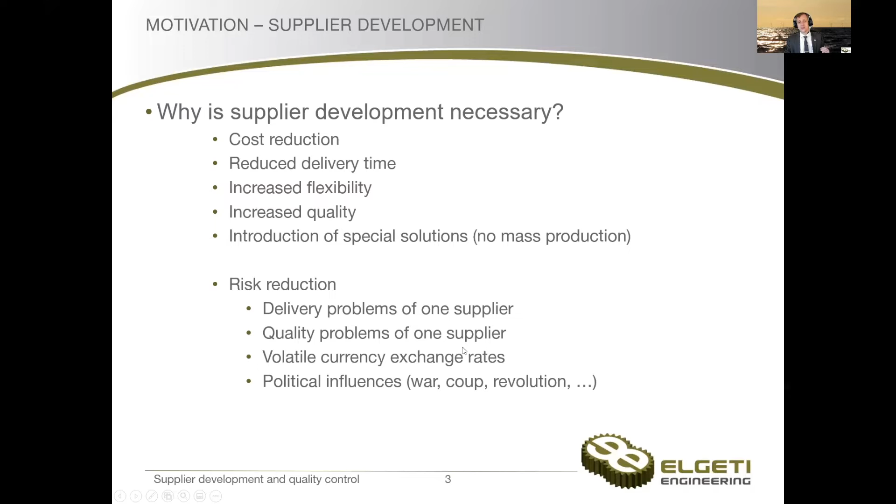Therefore, for all these reasons, we need to have a very flexible supplier base. If we would have only one supplier, or all our suppliers from the same country or region in the world, then we would be directly exposed to all these risks. That's why we need to address these risks and find alternative options.

So next, why shall purchasing be involved in quality assurance? Let me briefly summarize this. I think the first line here is most important: we all have to be aware that each supplier approval is a general quality risk.

No matter how many audits we do, no matter how much bearing testing we do, we can never bring all our risks down to zero. There will always be a remaining risk, and that's something we have to take into consideration.

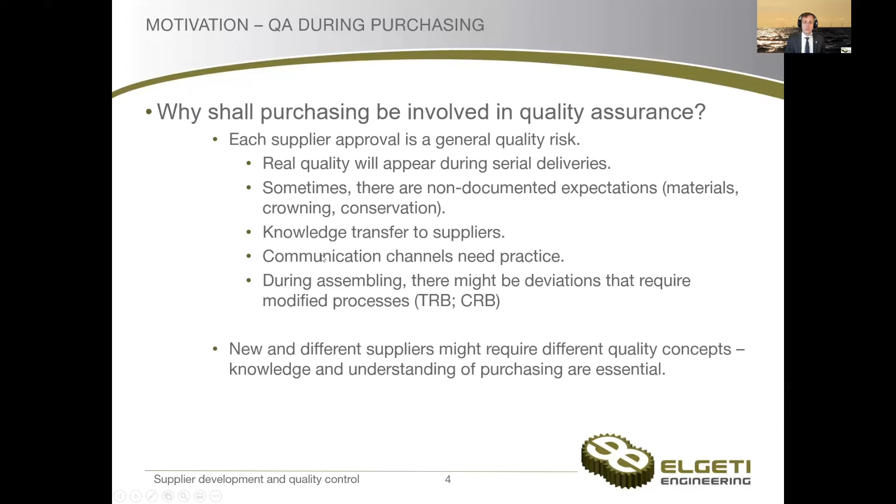So just quickly summarize, the real quality will appear during serial deliveries. The truth is on the playground, as they say in football. And sometimes there are non-documented expectations on the materials, etc., which suddenly turn out to be important. In the past, we might have transferred some knowledge to our suppliers, new communication channels need practice, etc.

A lot of details in the collaboration can become critical whenever approving a new supplier. These are things that purchasing certainly needs to be aware of. It's not only the price, it's not only the lead time. These details need to be taken into consideration.

Now, some further pictures on what can be important. So if we don't do this supplier approval properly, for example, if this would lead to a change of cage geometry, as was the case in a railway application, then we might end up in serious trouble.

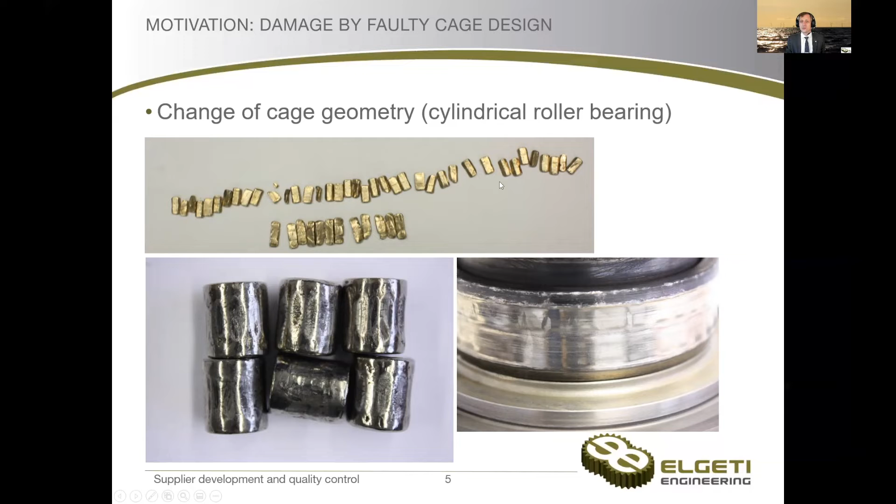This used to be a brass cage of a cylindrical roller bearing, and I think the further pictures on this slide demonstrate why it is important to take particular care for such details.

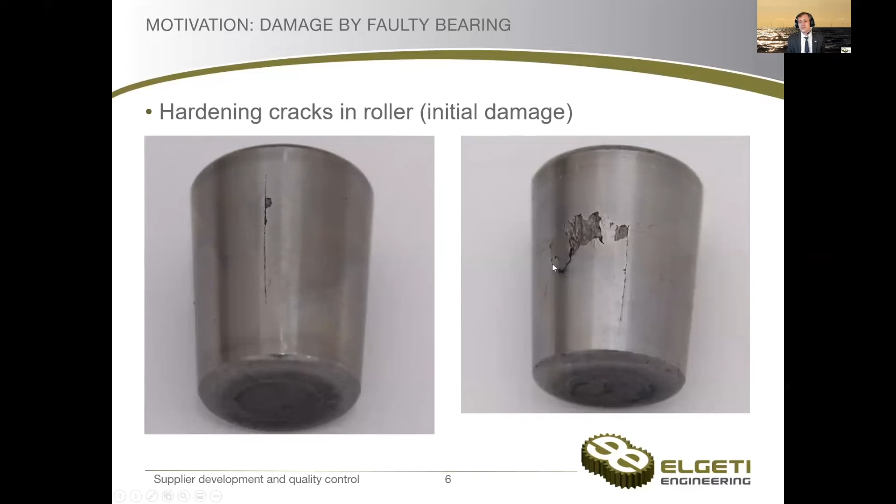If we would approve a supplier that doesn't fulfill our requirements, we might end up with hardening cracks in rollers, for example. These are topics that need to be addressed. These would lead to immediate failure. Shoulder fracture due to improper undercuts of roller bearings can be an issue.

These are examples of cases where supplier development has not been done correctly, and our customers ended up in serious trouble.

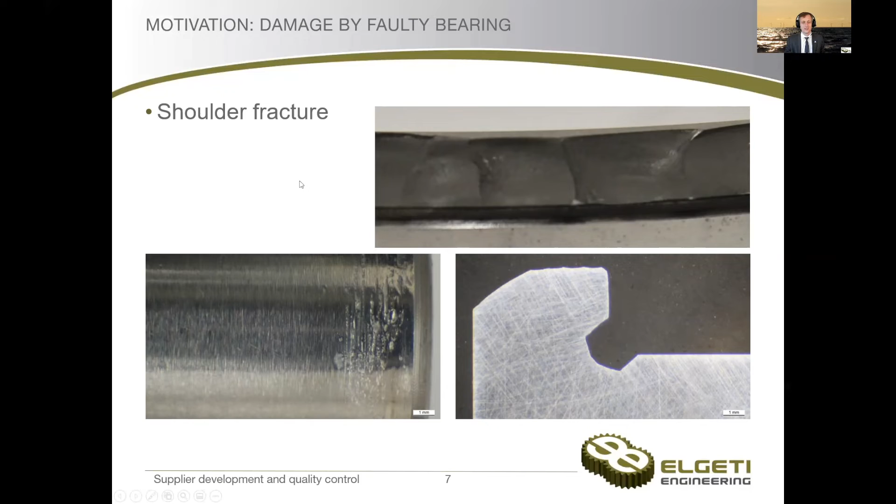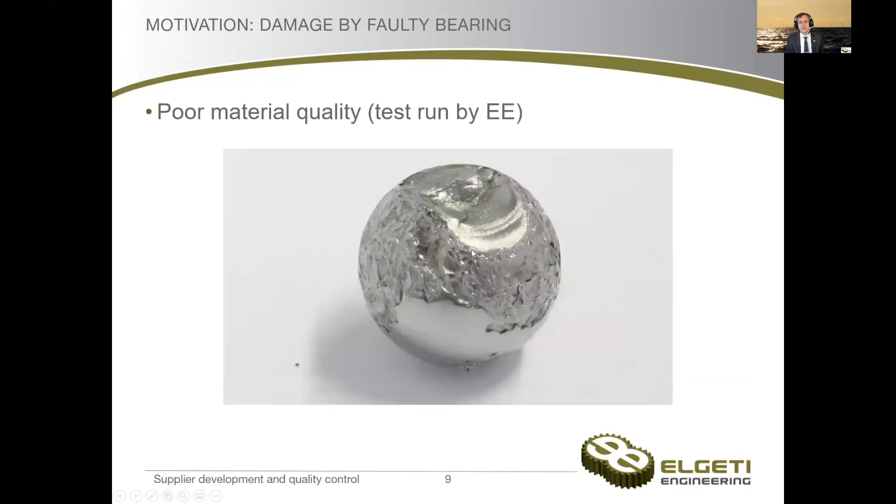So it is important. We have lots of reasons to approve new suppliers, and the recent pictures just emphasized how important it is to do all these things properly, to take the time before you have pressure, to be sure that you can always rely on your suppliers fulfilling your requirements.

This brings us directly to the next chapter, the definition of quality levels. Especially in the bearing trading business, it is quite common that people offer their products in various quality classes, with particular fancy brand names behind this. Sometimes this makes sense, sometimes I think it's questionable.

While questionable does not mean necessarily that it's wrong, it just means it's worth asking a question.

On the other hand, we all know that requirements can be very different. We do not always need the best of the finest or the finest of the best. It's not always necessary, and knowing your requirements very well can help save plenty of money.

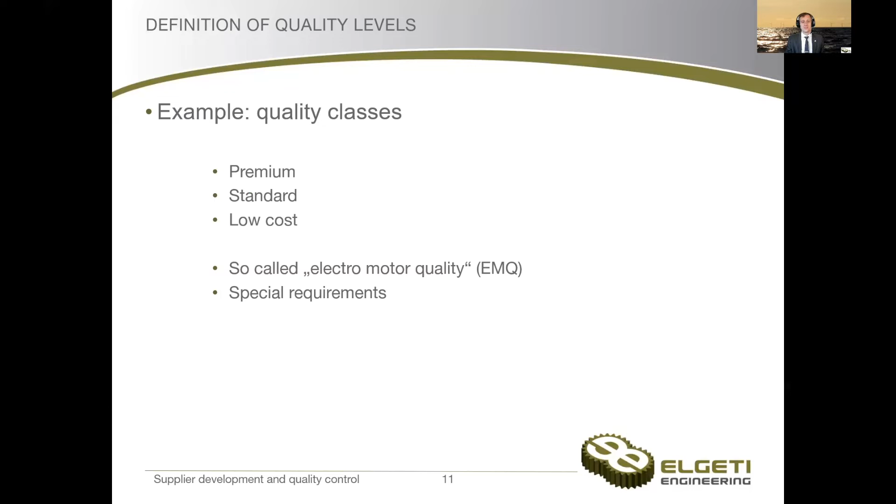So what does actually standard quality mean? To me, this is nothing that comes from literature. This is my personal proposal, and my definition of standard quality is very simple. It means that we can calculate the load rating of the bearings just based on the geometry and following the formulas and equations given in ISO 76 and ISO 281.

ISO 76 is for the static load rating and ISO 281 for the dynamic load rating. If we do this, and if we then do our dimensioning and lifetime prediction according to these standards, then our resulting expectation on the performance of the bearing must be fulfilled by the real product. This is basically what standard quality means.

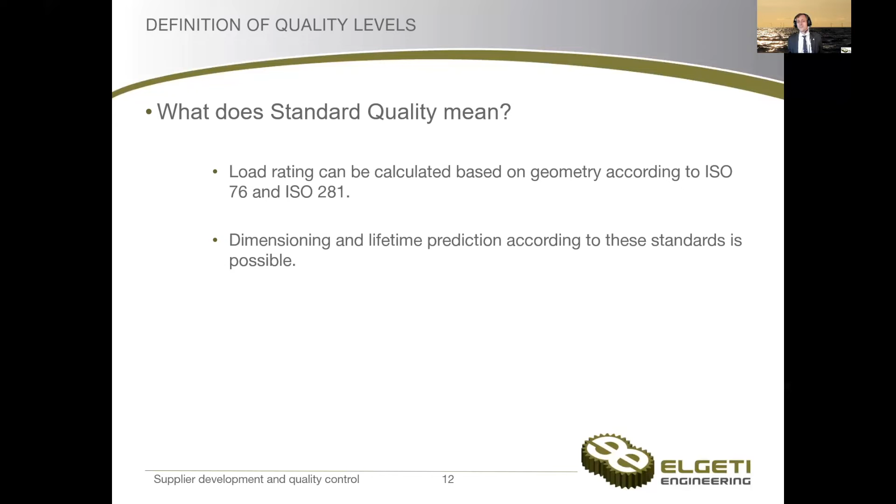So we take a bearing, we look at the geometry, we calculate the load rating. With the given loads, we can calculate lifetime, and the bearing needs to reach this life. That's basically what standard quality is about. Nothing more, nothing less. And what does this mean in technical terms?

Well, some assumptions that are behind these two standards, not explicitly written for each of them, are firstly that we have a hardness of 58 Rockwell C, material cleanliness according to ISO 683 part 17, fine grinding of raceways instead of super finishing—this is highly important—and production methods according to the state of the art from approximately 1990.

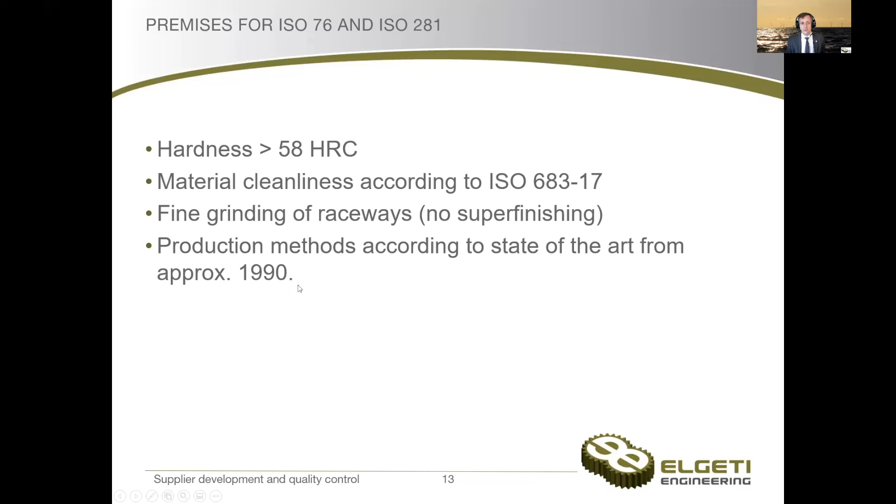And this already shows us why we can distinguish premium quality. What is the difference? There's no difference considering the static load rating, because in both cases we assume 58 Rockwell C, but the real endurance exceeds theoretic life by far, especially in mixed friction. That's most important. Where does this come from?

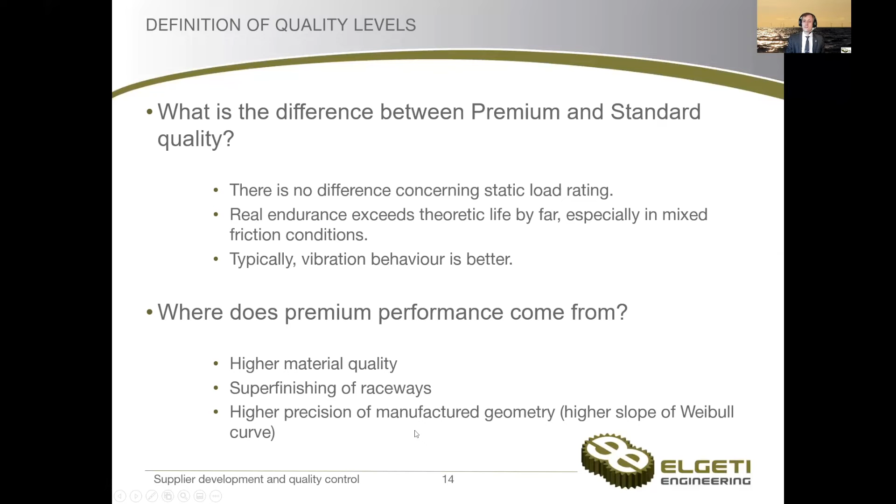Well, firstly from higher material quality, and then from super finishing of raceways. So remember, the standard requires fine grinding, but nowadays super finishing is common practice, especially for small size bearings. That means in theoretically mixed friction conditions, we basically have full fluid lubrication conditions, and therefore our bearings perform significantly better. The higher precision of manufactured geometry leads to a higher slope of the Weibull curve.

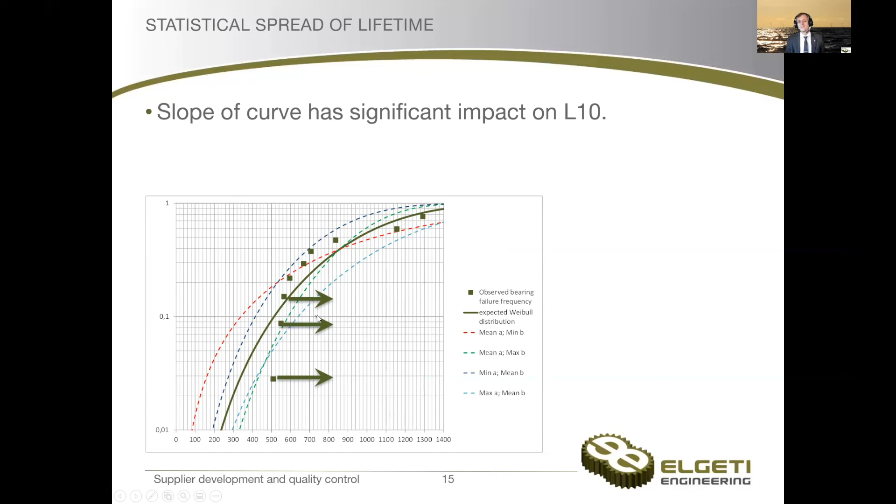That would change dramatically actually. Low cost quality, again, we would have the same static load rating, but we typically do not really achieve the theoretical life, which means low cost quality can be totally fine, for example, for the wheels of a shopping cart, etc. Nobody cares for the life calculation. Just the static load rating shall be given, so that it will not break away or something.

So now let's talk quickly about the factory visits and audits.

Factory visits and audits are important for understanding how bearings are actually produced, how manufacturers control their quality, what corporate culture they have, and whether they are reliable.

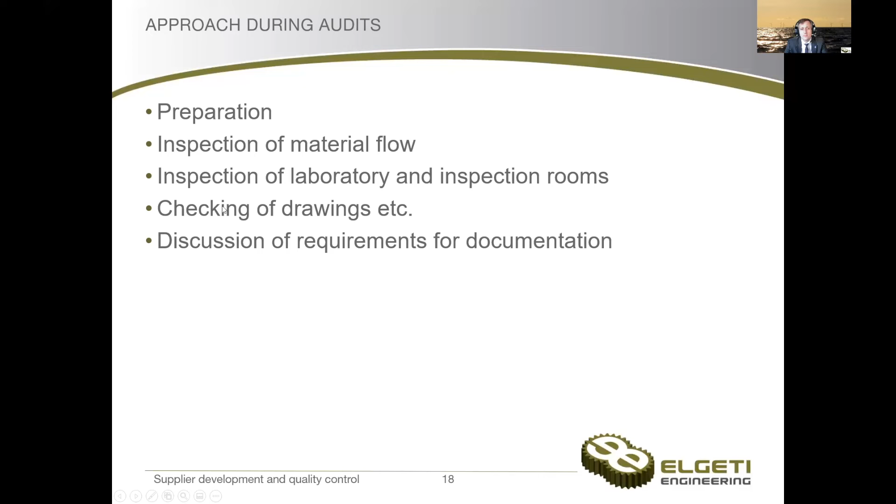So what shall we do? Firstly, we have to prepare ourselves. Then comes inspection of the material flow, inspection of the laboratory and inspection rooms, checking of drawings, and finally discussion of requirements for documentation.

So preparation of the audit is most important. If we are not well prepared, we can always be happy with each supplier, or we can be unhappy with each supplier, because there's always something we can find that could be better. Our evaluation would not be correct or appropriate if we weren't well prepared and didn't reflect on our actual requirements.

For example, it's very important to simply ask the question: do we really need premium quality, or could we possibly be fine with standard quality, or maybe even low cost quality is enough? No matter how low the requirements are, they still need to be safely fulfilled.

So which types are most important to me? Is there something we can address directly? Which quantity do I need? Did I have problems in the past? If so, what kind of problems? This would also help us directly address these matters.

Whom do I talk to, and in which language? Language barriers can actually lead to underestimation of the supplier, because simply, the people will not give the proper answers. And if we don't get the proper answers, we have to consider: either they don't know, or they are not really competent, or they just don't feel safe or secure with their limited language skills, or they didn't understand the question.

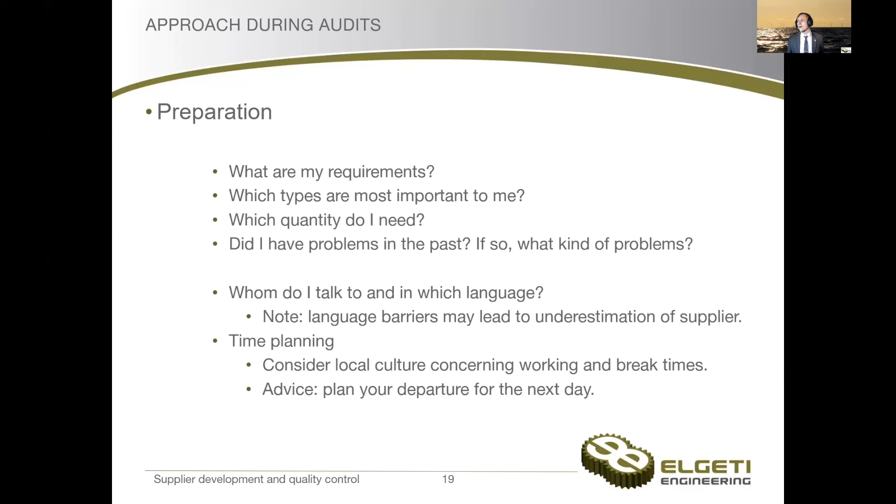Time planning is important, so always consider local culture concerning working and break times. Sometimes it can help to plan your departure for the next day, just to work around situations where people would waste time by intention just to avoid showing their details to you.

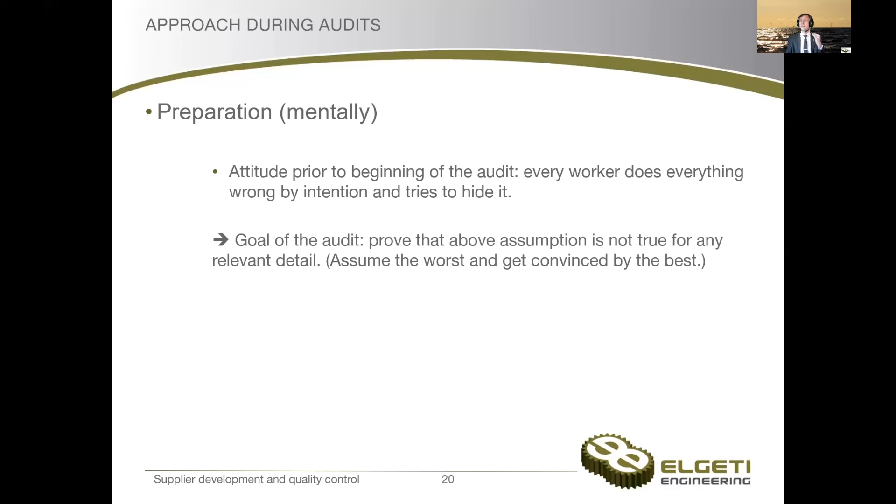Then mental preparation is highly important. The attitude is: before we begin, assume every worker does everything wrong by intention and tries to hide it. The goal is to prove that this assumption is not true for any relevant detail. So basically we shall assume the worst in the beginning and get convinced of the best. This is nothing personal - this is just the role of the quality audit.

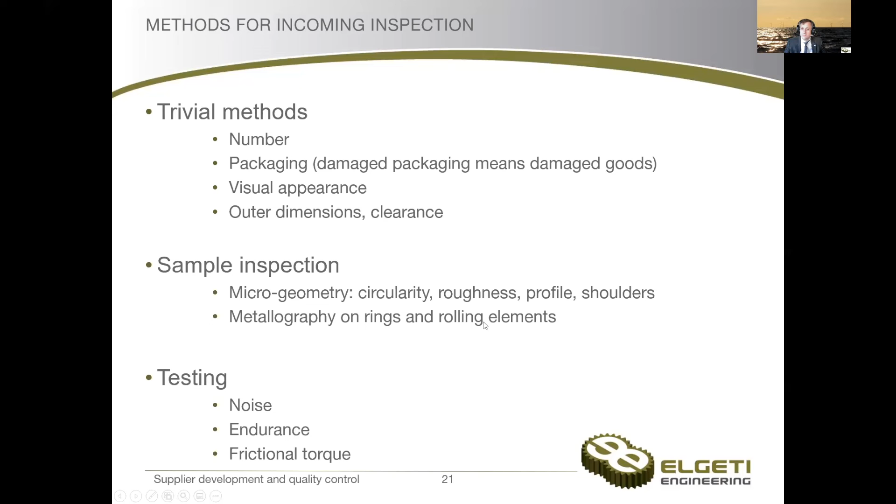So then let's talk about the inspection methods. Which methods do we have? The trivial methods for incoming inspection: counting the packages, looking at the packaging, visual appearance, outer dimensions, clearance, etc. Then we can measure the microgeometry, check the material, and apart from that, we have several testing options. Oh, this slide is a little bit mispositioned.

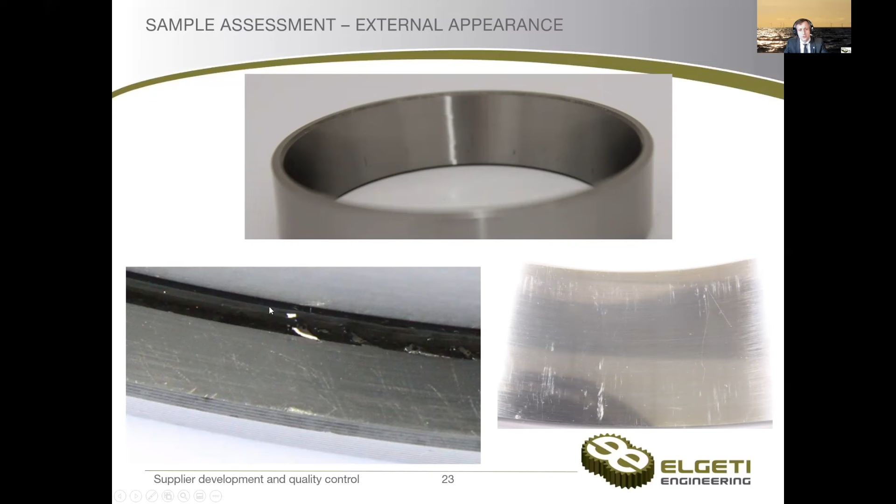Just quickly, if we do the visual inspection, what we don't want to see, for example, is transportation damages. We don't want to see chips and burrs here in the undercut of a tapered roller bearing.

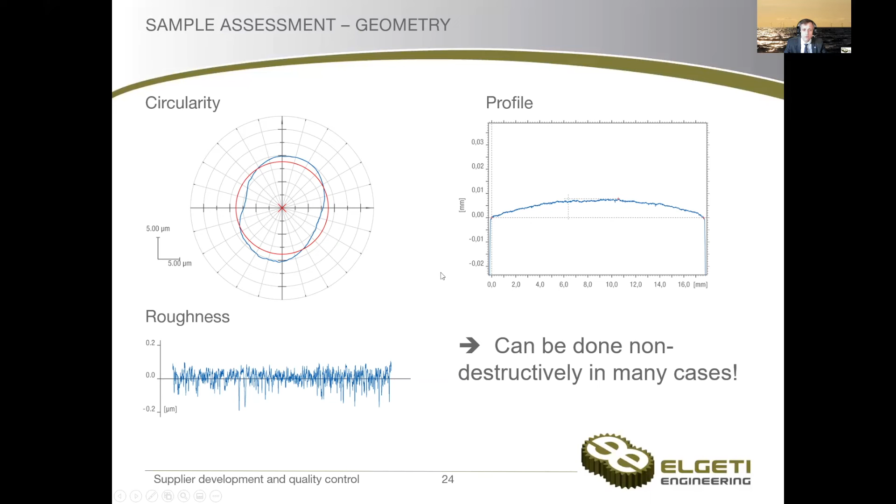We can, and this really makes sense, check every now and then the geometry of our samples - for example, the profile of raceways, circularity, roughness. The good news is that this can be done non-destructively, at least partially, in many cases, so we do not need to damage a bearing just to verify that our geometry is okay.

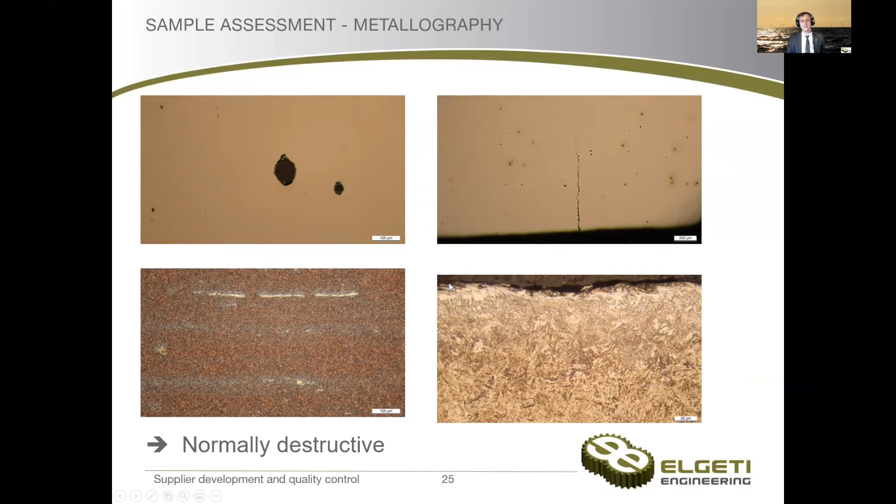Metallography, checking the material quality: we don't want to find cracks, we don't want to find altered structure, we don't want to find extra large inclusions or very conspicuous carbide segregation or something like this. Unfortunately, this is normally a destructive method, and therefore we would need to sacrifice at least one sample.

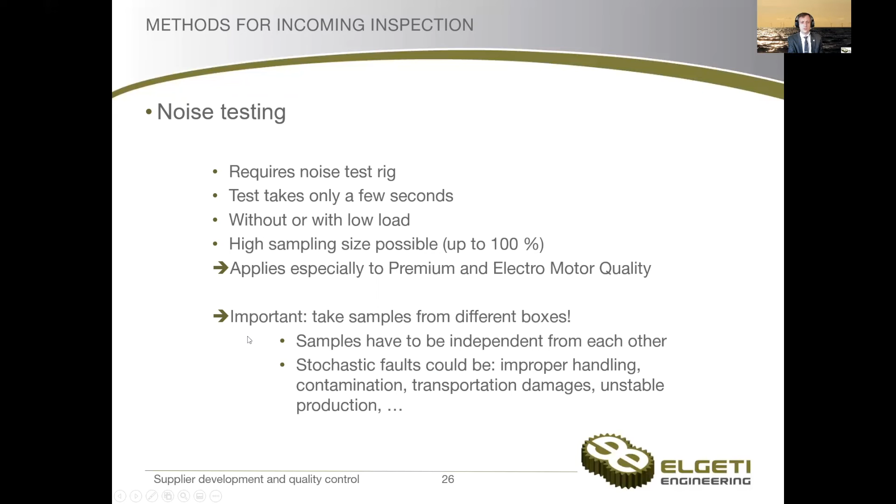Then noise testing, also a common method, but a little bit more expensive. It requires a noise test rig, and the good news is the test takes only a few seconds, without or with low load, therefore allowing a very high sampling size - up to 100% is possible. But if you don't take 100%, it is highly important to take samples from different boxes, just to be sure that these samples are really independent from each other.

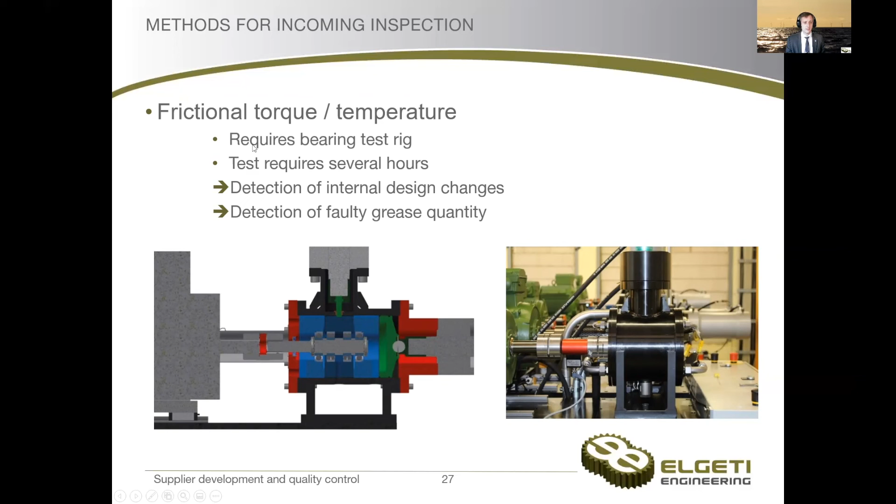Apart from that, frictional torque can be relevant, so here we actually need the bearing test rig. The test requires about a couple of hours, and this would be very helpful for detection of internal design changes or faulty grease quantity, and therefore is a very powerful method.

The most powerful method actually is endurance testing. Again, we would need a bearing test rig for this, and the test can take a couple of days for incoming inspection. For example, if we had deep groove ball bearings, four pieces on such a shaft—not in this sketch, but it could be an option.

At high load, high speed, we can run this test until 2 times theoretic life. For example, at such a condition, theoretic bearing life could be something like 50 hours, so that means in 100 hours, less than 5 days, we could achieve this criterion.

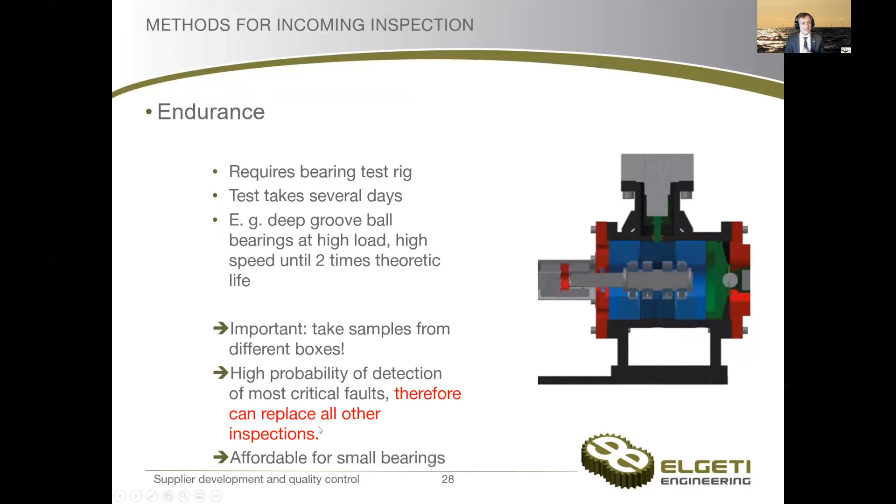If we do this, we get a very high probability of detection of most critical faults, and therefore this method can replace all other inspections. For small bearings, this is a really affordable and therefore powerful method.

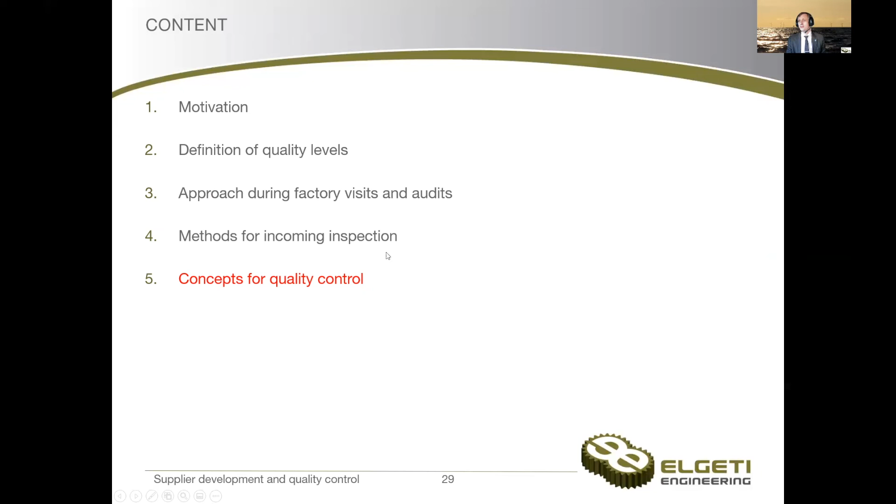So now, how can we bring all these methods together? For low cost quality, it's quite easy: certainly we shall visit the supplier prior to approval, and then do short audits at least every 2 years.

First sample inspection can be just a visual inspection, haptic testing of smooth function, outer dimensions, hardness of rings, chemical analysis maybe once, and the same approach for incoming inspection.

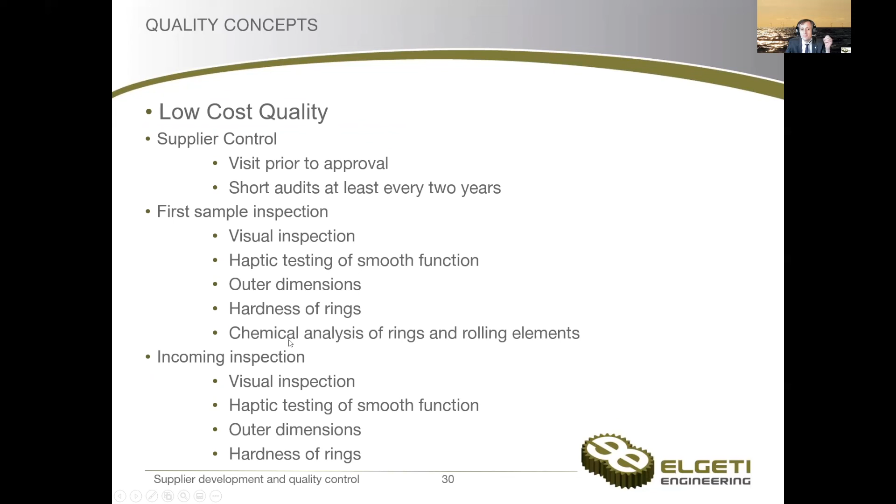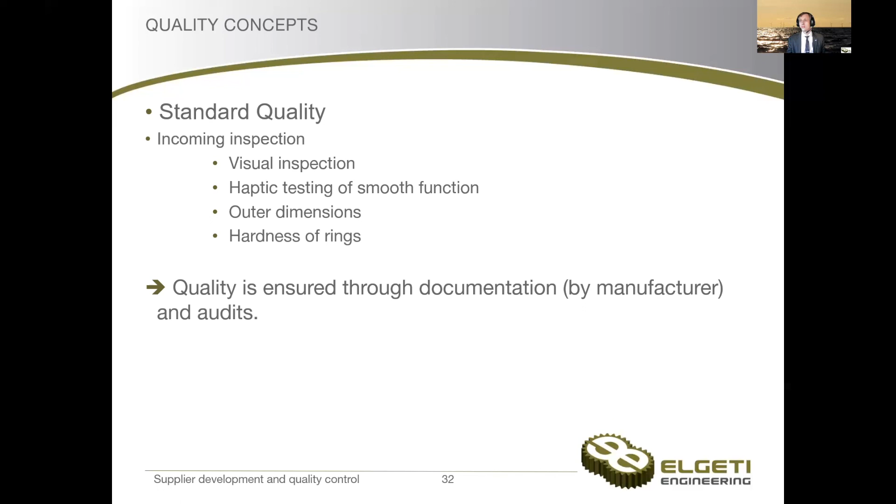And every now and then, following this for the incoming inspection. The general concept is that for standard quality, the quality shall be ensured through documentation by the manufacturer and the audits. So basically, when we go to the audit at the plant, we shall check whether they have proper records for everything that they did for us.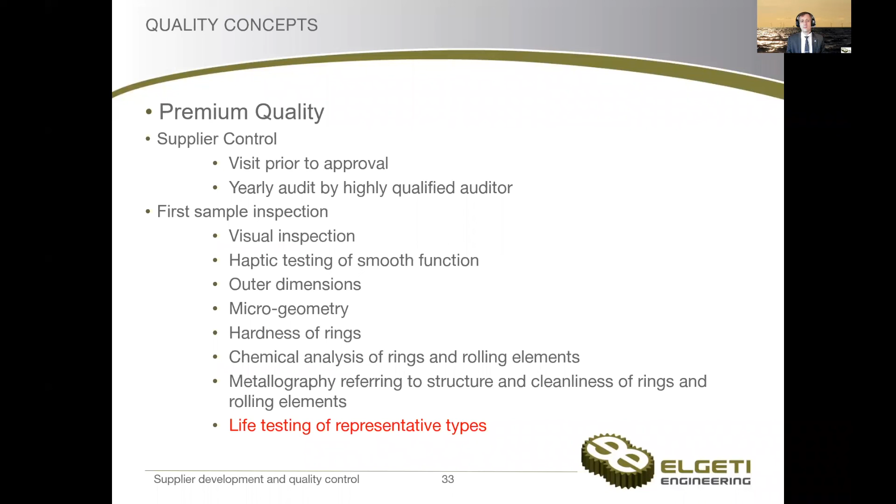For premium quality, it is the same, but with some additional things, because for premium quality we expect that theoretic life would be outperformed, and therefore we must conduct life testing. Certainly we shall do the quick life testing for incoming inspection, otherwise we would not be capable of really controlling that we can rely on this outperformance of theoretic life.

So the quality is ensured through documentation by the manufacturer and audits, but additionally, our endurance test runs will show possible trends. And now comes the interesting question.

If we currently have travel restrictions, for example with China, it is not possible or very difficult to visit China nowadays. If not being there from the very beginning, then the audits are not possible.

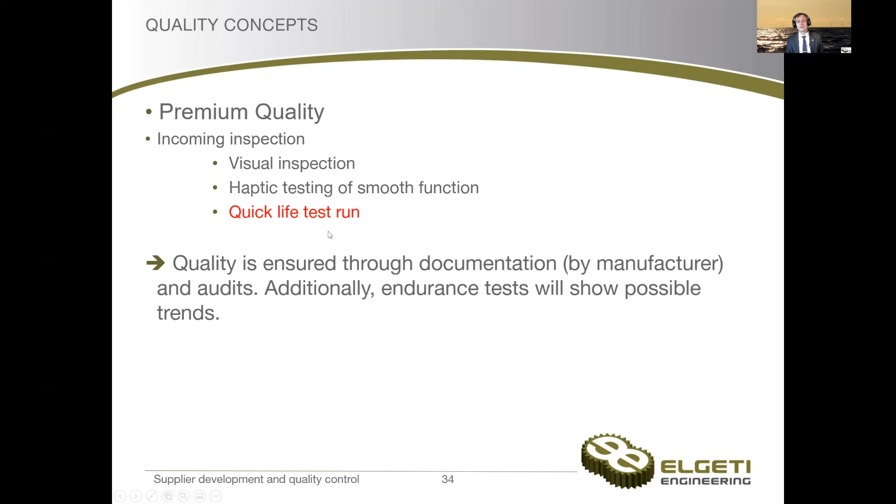Now we have two options. Either we could say okay, we just forget about the audits, we just believe, or try to do the audit virtually, which doesn't really make sense. Or we can implement these quick life test runs as an additional method, just for catching more evidence, more information on how well these bearings actually perform.

So with this proposal, or inspiring thought, I would like to conclude and summarize the presentation as follows. Firstly, our quality control concepts have to be aligned with the quality level, and furthermore, both initial approval as well as constant verification are essential.

Regular supplier quality control requires both audits and sample inspection. Premium quality means outperforming theoretic life and therefore requires regular life testing, and quick test runs are a powerful method for incoming inspection, especially for small size bearings.

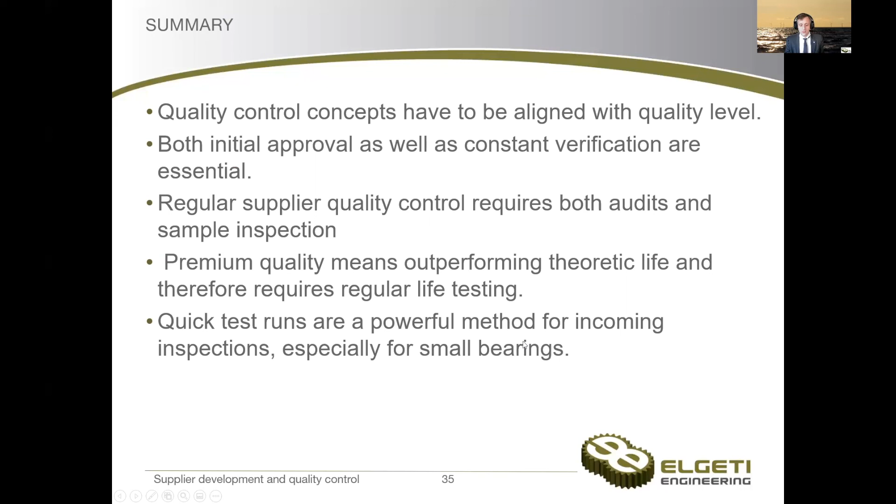And certainly if the audits would not be possible, like nowadays, then this can be a powerful tool. Thank you very much for your attention.